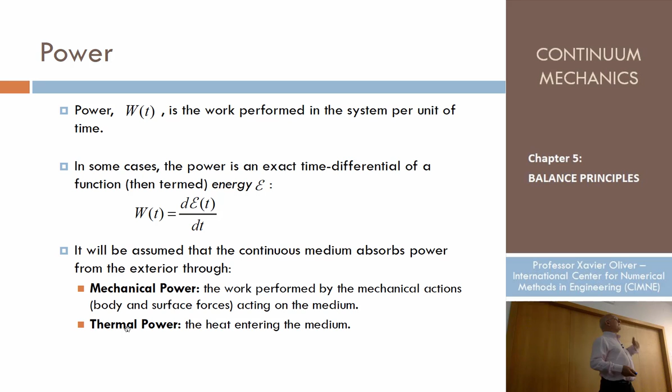Those are words. Now we try to express these words in terms of mathematical expressions. Let's consider our classical potato, our classical continuum medium. What are the external forces that act on it? The body forces, typically the gravity. What else? The surface forces, for instance my hand when it's moving it. What is the work done by these external forces per unit of time, that is the power? Let's do it step by step.

Let's consider a particle. Let's isolate it here, which occupies a certain volume dV. So the mass of this particle is rho dV. On this particle, there are some body forces acting in a certain direction. So the total force: these body forces are per unit of mass.

If we multiply them by the mass, rho dV, then you think that is the force that is acting at time t on this particle, which occupies an infinitesimal differential volume. Okay, that is force. What is work?

Well, work is force times distance. In a generalized way, the work of a certain force which is moved through a certain distance is the product, the dot product, it's a scalar. So it's a dot product of the force times the displacement of the point of action of the force.

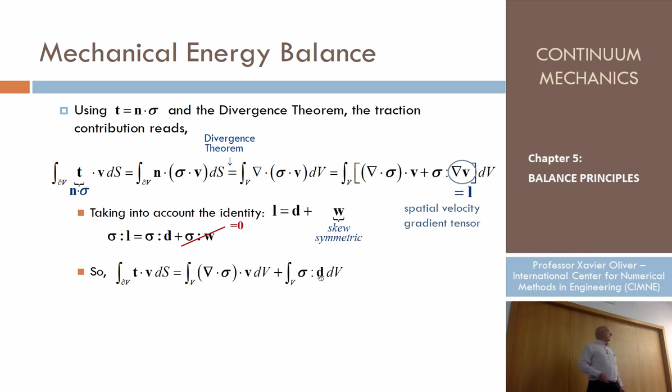And whenever we have a double dot product, a double contraction of a symmetric tensor times a skew symmetric tensor, the result is always 0. So this term cancels. So finally, I can cancel this term here, so the mechanical power by the body forces, plus what remains of this term, which is the integral on the domain of the stresses times the rate of strain. So that's the operation. I go back to my expression and I replace this result into here. And that's what we have here.

The mechanical power entering into the continuum medium, we're going to denote PE, mechanical power entering. Mechanical power entering as a function of t is the sum of the mechanical power produced by the body forces plus the mechanical power produced by the tractions. And that has been split into these two parts. And now I realize that I have integrals that are no longer integrals on the boundary, but integrals on the domain.

So now I can group these integrals. Let me put this term and this term together, and this produces the divergence of sigma plus rho b times v, plus this term that remains here. And I remember that in my pocket I have the balance of linear momentum, whose pointwise expression is that equation. Do you remember the name that we gave to this equation? It's the Cauchy equation.

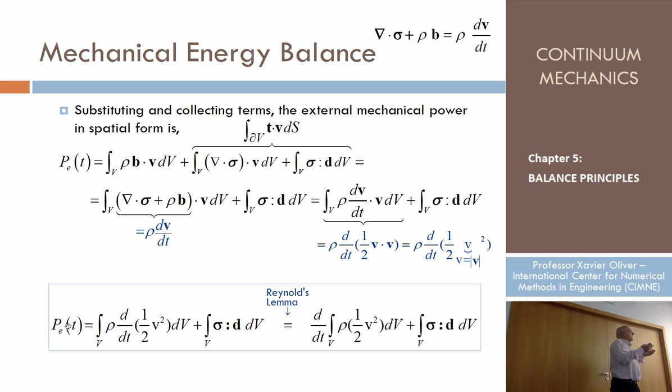Well, I did some work, and now I'm able to understand physically the power that I enter, the mechanical work per unit of time that I enter into the continuum medium: physically, on what is it spent? And now I'm going to do that. Look, I've arrived at the mechanical power, which had this expression, and after some operations and accounting for some other principles that I've derived before, it can be expressed like that.

Look, the integral over the volume of 1/2 of rho v squared, being the modulus of the velocity squared. Does that sound like something that you know from mechanics? What is the kinetic energy of one mass? 1/2 of mass times velocity squared. If the mass is infinitesimal, that would be 1/2 of the mass rho dV times v squared. So the kernel is the kinetic energy of one particle. If we sum for all particles, this term is then the kinetic energy of all particles in the continuum medium.

So all particles here, when I introduce some mechanical power, some external forces, the gravity, even if I don't have any external forces, there is an action, which is the gravity forces, that produces some movement of the body. So that mechanical power, on one hand, is again a balance. That is the mechanical power that I enter into the continuum medium. And now on the right hand side, we have the consequences of this mechanical power. What are the consequences? On what is this mechanical power spent?

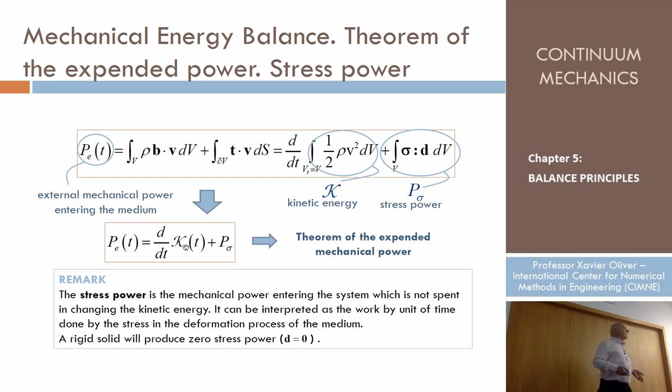And then the stress power can be defined as that part of the entering power which is not spent in changing the kinetic energy. Okay? You have these concepts already consolidated?

Okay. So now let's consider another way of introducing power into the body I'm dealing with. So imagine the continuum body, and imagine that I enter, for some reason, some heat into it. That heat entering into the body per unit of time is what we call the thermal power. And it's another way to introduce power, that is work, but this time in terms of heat per unit of time. So we are going to consider two ways of introducing heat into the continuum medium.

Well, remember that I said that we could consider every particle of the continuum medium as having properties and keeping those properties in a pack that every particle carries. Okay, now imagine heat. Now we are focusing our attention on heat. So let's look at the heat of every particle. How can this heat be increased? Well, it can be increased for two reasons.

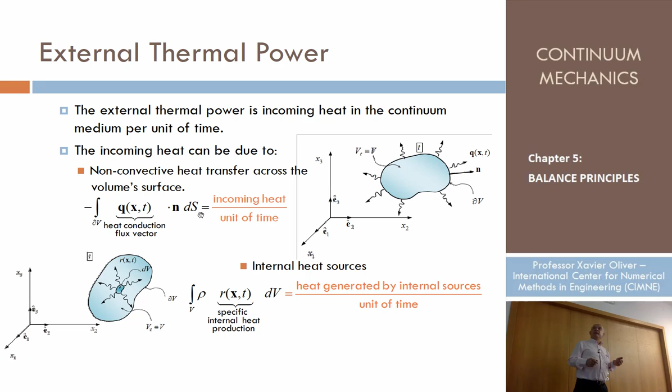Maybe there are other reasons for which heat can enter into the body, but let's stop here and consider that these are all the reasons for entering heat per unit of time, that is, entering thermal power into the body. So finally, the amount of heat that enters into the continuum medium per unit of time, which we denote Q entering of t, is the part that comes from the internal sources of heat, minus the part that comes from heat conduction, exchange with the exterior of the domain.

And now I do the same operation as ever. I have the integral on the boundary of a closed domain which involves in the kernel the normal n. So I just invert that, because this is a scalar product of two vectors that can be transposed, so it's n times q. And now I apply the divergence theorem. I replace n by the divergence, and the integration on the boundary by the integration on the volume. So I obtain this term, and I can join these two terms in a unique volume integral, which is rho r minus divergence of q.

So what is the meaning of divergence of q? The counterpart at particle level of the heat which is lost due to exchange by conduction with the exterior. At the local level, that term is the counterpart of that. So let's assume that these are data. We should know, in order to deal with that, the mathematical expression at every point and every time of the conduction flux vector, and also the internal sources expression.

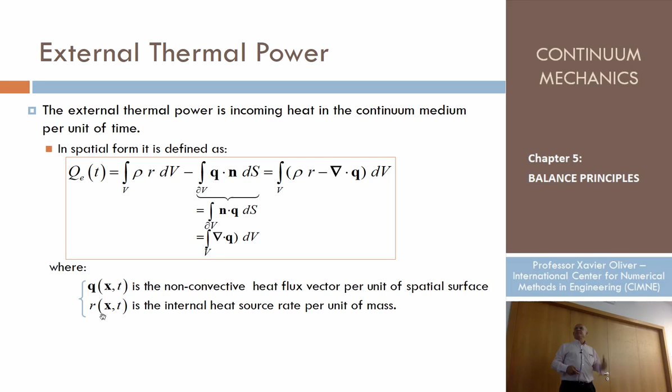So now we can sum. For this body, there are two reasons for entering power, work per unit of time: mechanical reasons and thermal reasons. We know that the mechanical power is equal to that part here. And we have also seen that the heat power is equal to these two terms here, which can be expressed in that way or alternatively in that way. That is the total power.

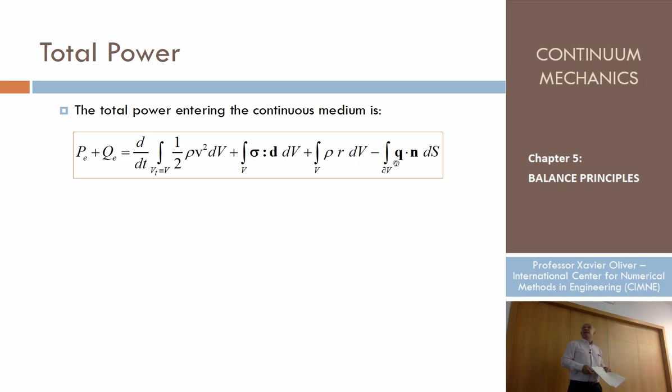Again, it's a balance. That means that the total power that enters into this body, now accounting also for thermal power, is spent in what? In variation of the kinetic energy, in producing some deformation work, the stress power, which is here, in increasing the heat due to the internal sources, and losing or gaining some heat due to conduction with the exterior. Okay?